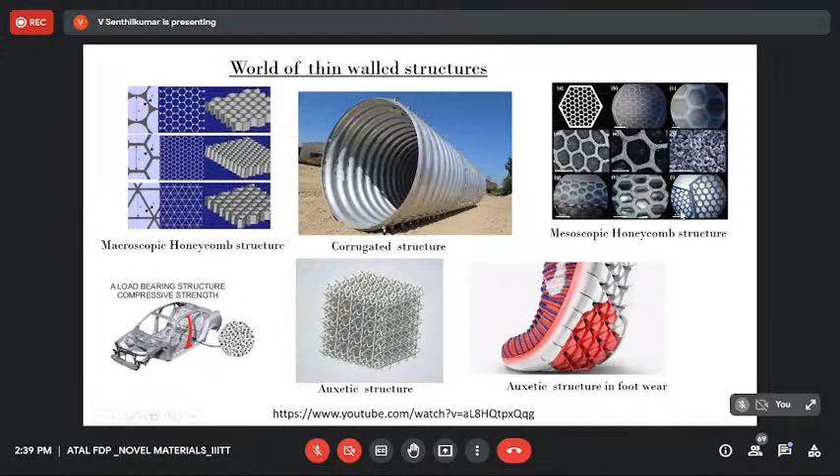So most of these thin wall structures make use of polymers, that is, polymer reinforced composites, or aluminum. That is the advantage of this kind of thin wall structure. Now there are three categories of materials in the thin wall structure. One is foam. I think you have some basic idea about foam. Foams have a pore structure; they have porous structures.

How to create the pores? It depends on the material; it varies from material to material. You can create that kind of foam structure with steel, with polymers or with aluminum. Different manufacturing processes are applied for producing this kind of structure.

So foams basically have pores. The pores are not uniformly distributed. It is a kind of probability distribution, so we cannot say exactly that at this place this many pores will be there. It depends on some other physics. So a lot of research is going on to evenly distribute the pores.

Basically these foams are created in two different forms: open cell metal foam and closed cell metal foam. Some of you would have done experimental work on open cell metal foams. Open cell foam we can create in a foundry by casting, and we can do it in powder metallurgy also. We can add some material that will evaporate when heated during sintering, and during compacting, the initial stage where the mechanical bridging is happening.

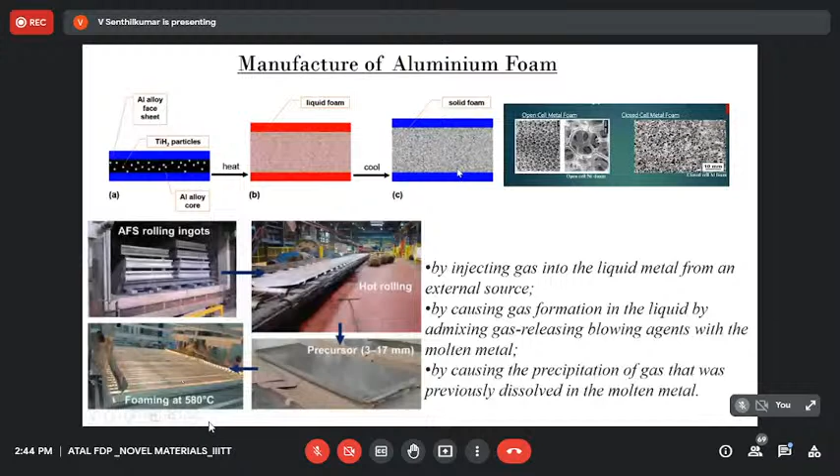So you can see here how these foams are manufactured. A long aluminum foam structure is created, AFS rolling ingots; these are the big ingots, and we can reduce the thickness using the hot rolling method. You can foam at 580 degrees centigrade, and this is the precursor. With this technique, mass production of foams can be achieved using this rolling method. Rolling and foaming is done. Foaming is the process of blowing gases through which we create these foams. So these are the manufacturing techniques for these foams.

So what are the advantages of these foams compared to conventionally available metal? Here I have taken this aluminum foam structure. Suppose we take steel as the baseline. Required thickness for equal stiffness, let us say 4.7 mm. For that steel plate of 4.7 mm, the equivalent stiffness in aluminum requires a thickness of 6.8 mm. For CFRP, carbon fiber reinforced composites, the thickness has to be increased to 5.6, but see how much mass is used for steel.

We know the density of steel is 7.85, and for aluminum it is 2.7, and CFRP is further less, normally 1100 or 1200 kilogram per meter cube. For this aluminum foam structure, the maximum relative density is normally only 28 to 30%. So even though aluminum is 2.7, here we get only 400 to 500 kilogram per meter cube. Just imagine how much weight it saves. The equivalent mass of steel is 73.3, and the equivalent stiffness with this 8 mm aluminum foam structure is only 12.8 kg.

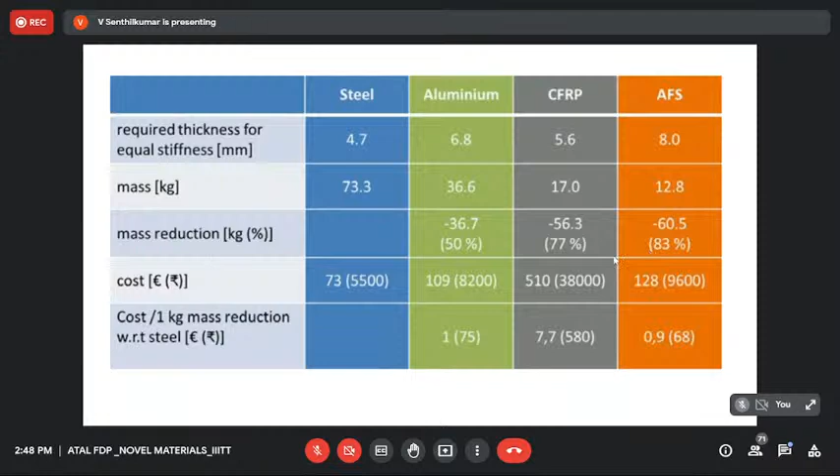The next thing is where it is being applied today. Earlier these metallic foams were mainly applied as structural materials, and today it is being applied everywhere. Today I will take one case study where this can be applied for a high-speed train. At the front of the train, we can have these buffers, so that it will absorb energy during a collision of the train.

So earlier it was applied only for energy absorption as structural materials. Today it is applied everywhere. Wherever you want to reduce the mass or absorb more shocks and energy, you can apply this. You can see some of the applications here. Here it is used in the battery compartment of an electric vehicle, where the weight of the structure has to be reduced, and for that we are using compressed aluminum foam structures.

They are used in the sealed edges, the module comprising underbody, and battery compartments. And you can look at the second diagram where exactly it is located. You can see the crash absorber box at the front of your automobile, made of a rectangular aluminum alloy profile filled with aluminum foam.

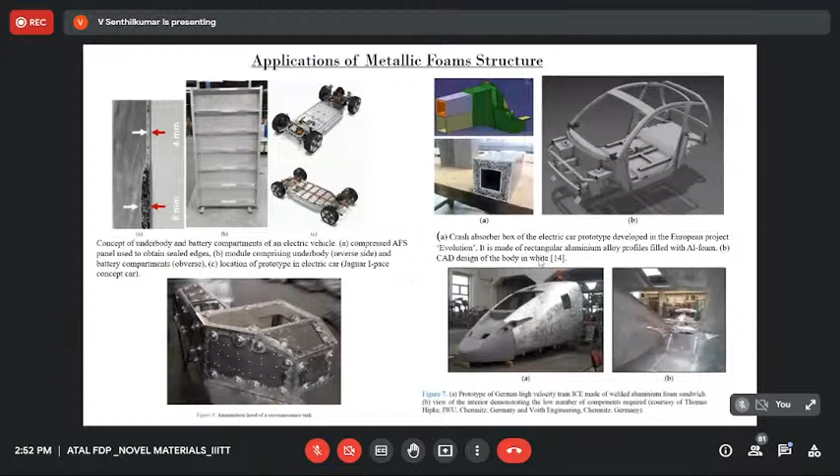Okay, so what are the other characteristics of that? It is having low density, we know that. The second one, it is high strength to weight ratio. Second advantage, high surface area to volume ratio. This is like nanomaterials. It's having high surface area to volume ratio. And it is having one advantage compared to composites.

What is the drawback with the composites? So I hope you can also interact so that it will be somewhat good. Understanding will be good. What is the drawback with all the composites, right? These polymer composites. And in fact, the drawback with the processes like rolling, extrusion and all. So they are good at reducing this.

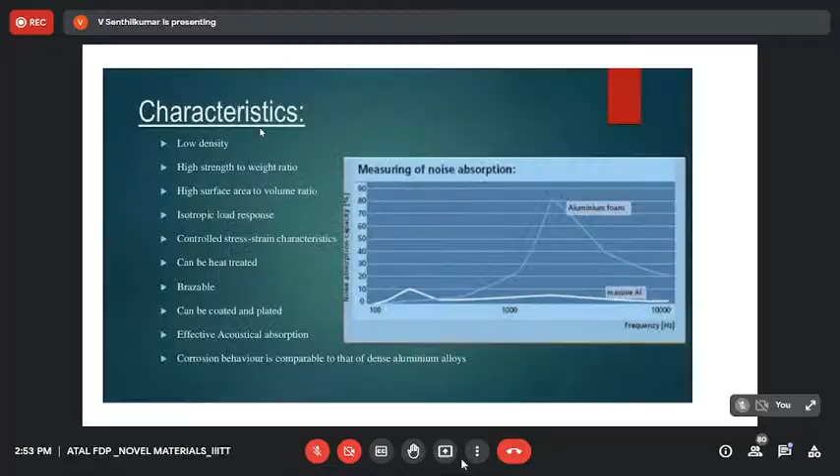The other things are, the first three are very good. They have low density and high strength to weight ratio. They have good surface area to volume ratio. Everything is good. But when it comes to that fourth property called isotropic load response, okay, this foam will behave like an isotropic material. What do you mean by isotropic? What is the drawback with the other polymer composites?

Polymer composites, you have these polymer composites. Even today they are designing them with good fire resistance and all. Okay, in spite of all, they have one drawback. What is the property that is called? Yes?

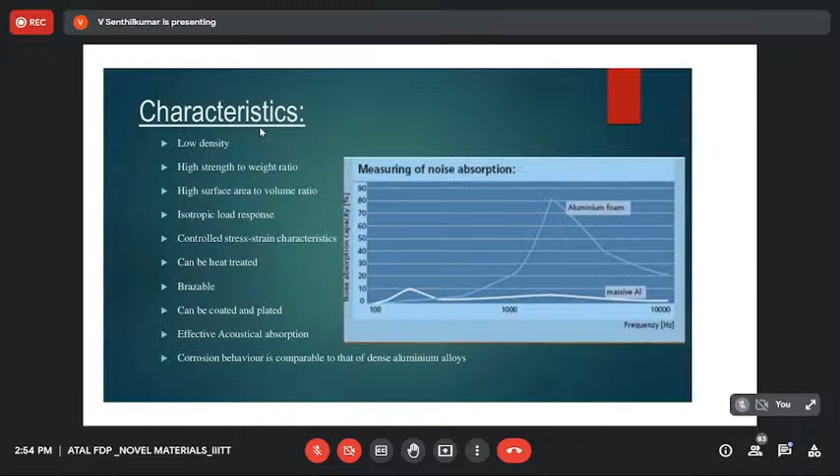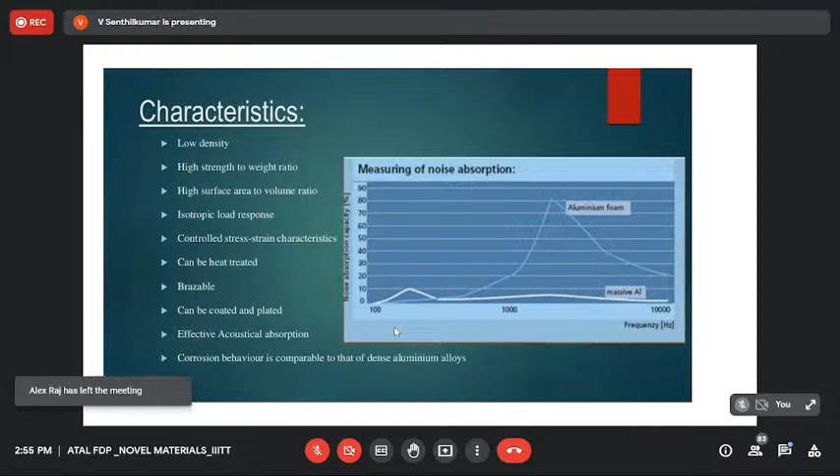So, Velmurugan, are they interacting or? Yes, I could not get it. A little louder I can talk, since I'm not using any headphone, a little louder maybe. Yes? Yes, sir. I think one participant said something, but the voice is not clear, sir. Velmurugan, my audio is good there, no? Yes, sir. Your voice is clear, sir. Okay. Voice and screen. So are people interacting with the faculty members or? Yes, sir. Okay.

So at least some of you interact with me, it would be good, because these are some basic things which you will teach, because all are mechanical engineers, it is told. So it would be good if you interact. I will not get bored, but it will be monotonous because we are online. When I'm on the stage looking at your faces, I get some feeling of conveying something. Otherwise, this would not be good. So I expect some of you to interact with me. I will not pose anything much challenging. It's all basic fundamental ideas only.

So like I told, manufacturing processes like rolling, extrusion, and drawing operations have an inherent problem of anisotropy. When you have anisotropic properties, you can't expect the same mechanical properties in all directions. When it is used as a structural member in some product, the behavior of the material upon disturbance from external media should be the same, irrespective of whether the load is applied in the x, y, or z direction. It has to respond similarly.

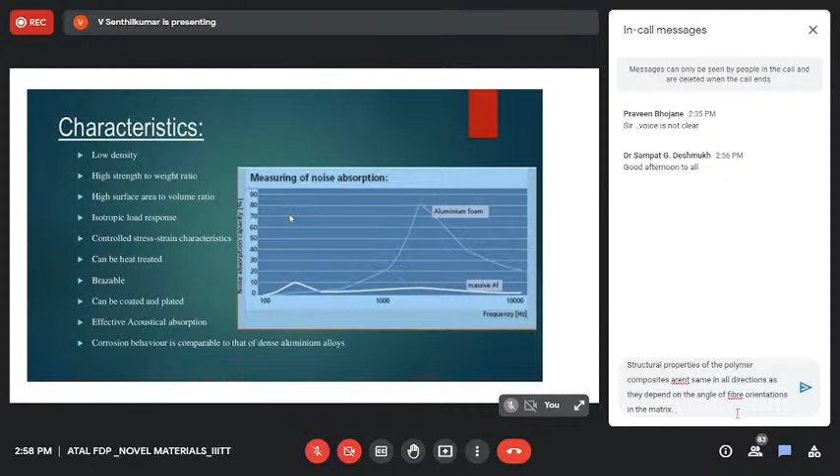Now you see the graph where conventional aluminum alloy and aluminum foam are being compared, and the noise absorption capacity is very high. So this can be applied in acoustic attenuators. Wherever you want to absorb acoustic waves, we can use this aluminum foam.

So now we'll move on to the second class of material called honeycomb structures. We have seen the manufacturing process for foams and their advantages compared to conventional material. Now coming to honeycomb structures. Why is it called honeycomb? The name says that it is used by bees for storing honey; they build the hexagonal structure using wax, and in that they store the honey.

Actually, these shapes are nature created. Foams are not like that; they are artificially created. But these honeycomb structures are nature inspired, especially this hexagonal honeycomb. What is so special about this hexagonal structure? Can you tell? Because the hexagonal structure has an advantage compared to other shapes.

It may have a triangular shape. You can create square shaped structures, trapezoids, circles also. Compared to all other shapes, what is the advantage of going for a hexagon? Why are these bees building the hexagon as one unit? Any idea?

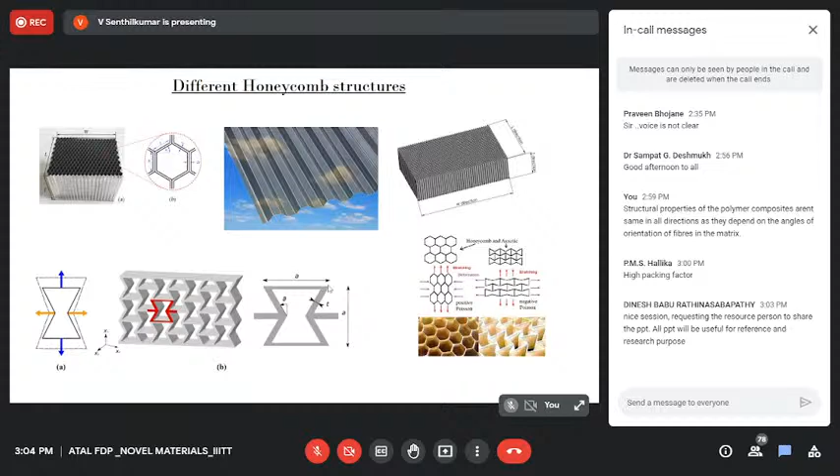So simultaneously, what happens to the length is it gets increased, and what happens to the diameter? The size is reduced. You increase the length, and the shape is reduced. So what do you get? Positive Poisson ratio.

Unlike that, in the case of auxetic materials, when you are applying load, by virtue of the geometrical arrangement, when you are stretching, what will happen is that this material gets expanded. You'll see in the next slide how it expands. So when you apply load, you'd expect the cross section to reduce, but it doesn't happen because of the arrangement of the structure, the geometrical arrangement.

So when you apply load, what happens? It elongates, expands. You see here, this is the original configuration. It's called a double V structure or a re-entrant component. It looks like a double V structure.

So when you apply load, what happens? It comes out of it. You can see here the dotted one is what is called after elongation. When you apply load vertically, the final unit cell will be like this.

Now, instead of stretching, I just apply a compressive load. What we expect when compressing that material is that it gets elongated, isn't it? Like forging, when you do upsetting, when you apply load, it bulges - the diametrical dimension increases. But that's not what happens here. When you apply load, it further reduces in the direction of loading.

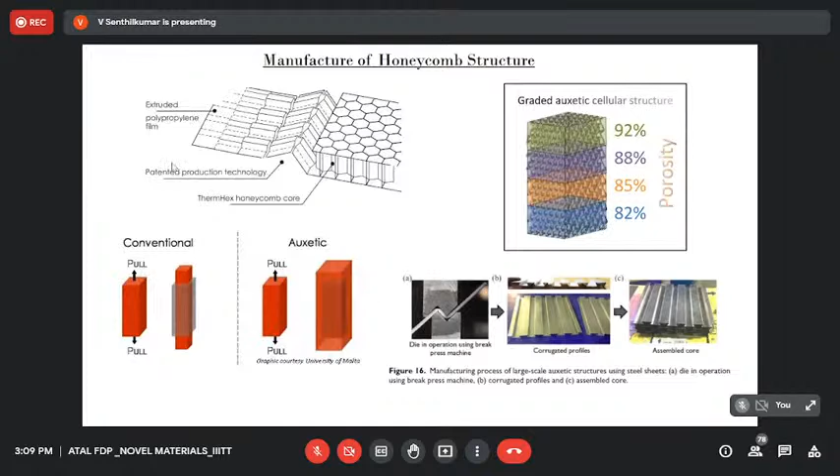So these are graded auxetic cellular structures. This is a continuous material, and initially it is 82% porosity. So here also it is porosity everywhere. Now in the honeycomb structure, how do you calculate the relative density for this material?

Foams, how do you calculate the density? Foam density you can calculate using the Archimedes principle, you can find out the volume, and then calculate the mass. Mass is the property you can directly get, and volume you get from Archimedes.

How do you get this theoretically? We can create a unit cell, and find out the total area of that and the area of the sheet metal. Then we can find out the relative density.

Normally, for aluminum foam, the maximum density is 30%, but in real applications you will use only 15%, 20%, depending on the application. This honeycomb will have a maximum density of 10 to 11%.

You will normally get 7%, 8%. The maximum density achieved in hexagonal honeycomb will be around 10 to 11%. This auxetic structure will be slightly more, you can get up to 20%. Corrugated structure, we may go up to 15%.

How can you design that? This is the unit cell for the auxetic structure. This thickness, the foil thickness, you can increase. This is your sheet metal.

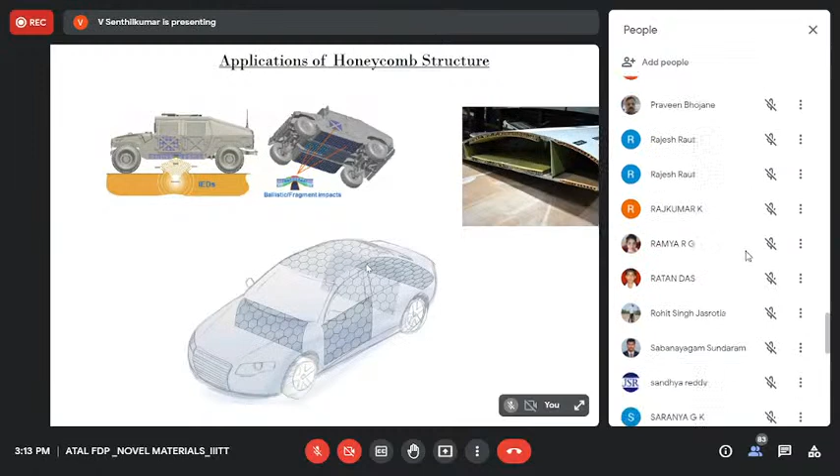In electric vehicles, it's everywhere, because electric vehicles require lightweight construction, but simultaneously you cannot compromise on stiffness. So we are using this kind of honeycomb structures there.

That will also absorb energy. For any collision impact, that will absorb more amount of energy. Another area where this is being very prominently applied is in armored applications.

Here, when an explosive device or mine blast happens, this is applied in the floor plate. The floor plate will absorb energy, whatever blast waves occur, and these waves are absorbed by the honeycomb structures.

These are also applied in the sideway panels, because hand grenades are thrown to the side, not at the bottom. This happens when they use IEDs or mine blasts, and normally they throw grenades sideways.

So there also we are reinforcing all these panels with this kind of thin wall structure, reducing weight while simultaneously increasing the energy absorbing capability.

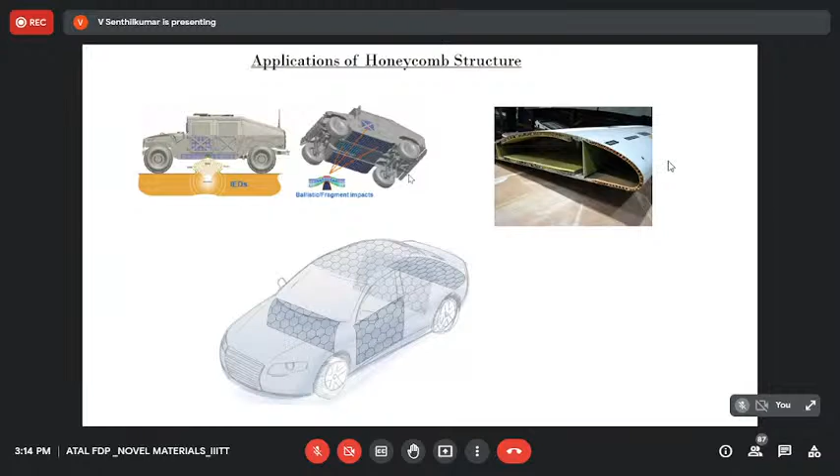Now coming to the design part, how to design a foam—in fact the same concept applies to the honeycomb also. Design of polymer composites is different, but the design of foams and honeycombs are almost the same. How to do that, I'll tell you.

So, up to this point in the slides, if you have any questions, you may ask before proceeding.

Good afternoon sir, when you're talking about the auxetic material structure, is it that you can get the auxetic material only by a change in structure, or can we also get it through an alloy, by changing the compound? Yes, yeah, you can see the material is different.

So I told you, all these lightweight thin wall structures have a twin objective. One is you can keep increasing the strength by alloying. We now have aluminum honeycombs using various aluminum alloys—6000 series, 5000 series, 2000 series are used. Whatever new alloys come up with good strength and good corrosion resistance, you can use. But it has nothing to do with the material itself—it is simply because of the geometry. By engineering the geometry, we are getting the property.

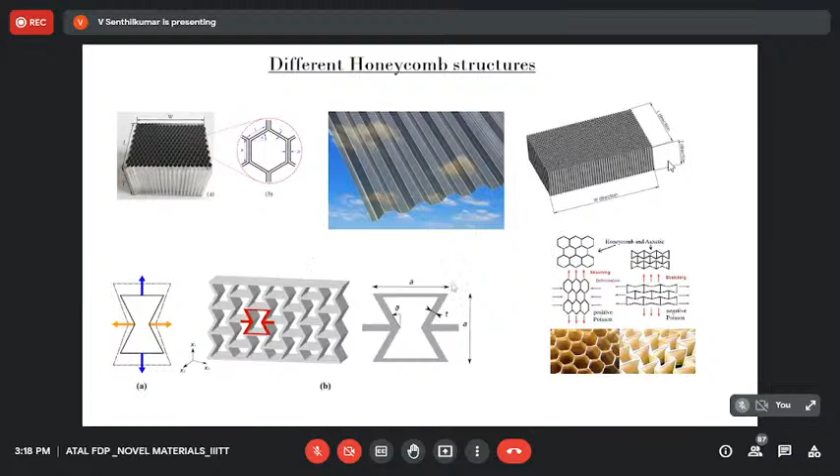Okay, these are all the design aspects. Thank you, sir. So now coming to how to design.

We'll see this normal stress-strain curve—we know about the stress-strain curve for engineering materials, having an elastic limit, then a yield point, then flow localization or instability point, and ultimate tensile strength and so on. Now it's different for this kind of material.

The plateau region is where the slope is very gradual, almost constant—sometimes nearly horizontal. For the same stress or load, as long as you keep applying the load, the strain continues happening. Then the third region is the densification region—once densification starts, the material begins performing like a 100% dense material.

Now we know they are not fully dense—they have 20% or 30% density compared to conventional material. So what happens in the first region? If it's a foam or honeycomb structure, it will not close down—crushing will not start. At the end of this first slope, the crushing starts.

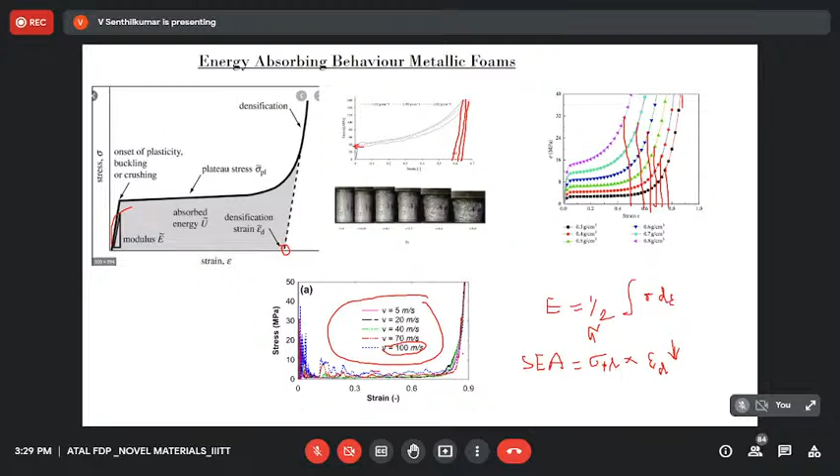So, as I told, this honeycomb structure also behaved like this. As you increase the density, you can see that this is going this way. Again, like foams, they have three distinct patterns here. The elastic behavior is not so apparent, whereas this is the plateau region, stage 2. Stage 3 is the densification region. So the first region is not apparent there, but this shows two distinct regions.

One is the closing or compacting region, this is a fully compacted region, and this is where the load is applied on it and the height is reduced. These are the curves for force and deflection, and you can see how this midpoint deflection happens under a normal load. The property is tested in different directions. You have three directions, I told you, and they are not behaving like an isotropic material like foams.

So these are anisotropic materials. That means they are behaving like an orthotropic material. What do you mean by orthotropic material? Anisotropic we know. What do you mean by orthotropic? You would have heard about composites. Composites are orthotropic materials. What do you mean by orthotropic?

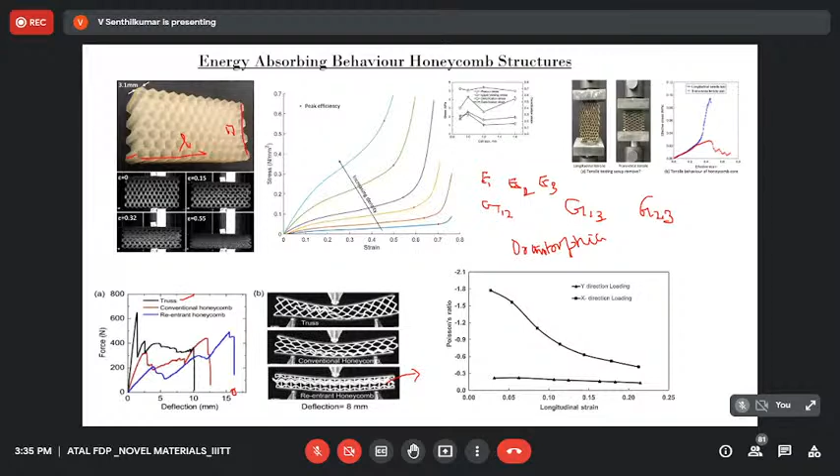So for that we have to initially design: this much energy I should absorb, so this should be the stress and this should be the strain, and these are the unit dimensions. What should be the size of that honeycomb cell, or if it is auxetic, what is the re-entrant angle, and what is the thickness of the foil, and other things you have to design.

So some other design aspects here. These are some material data. I told you that the density starts from 10 to 104 kilograms per meter cube. The density is very small. And see the energy absorbing capacity of these different materials. These are the densities available, and in the graph you can see different densities from 26% till 46%. This is nothing but relative density.

Rho star is nothing but the actual density of the foam divided by the density of the fully dense, solid material. So 0.263 means 26%. On the vertical axis is energy absorption capacity, W, in megajoules per meter cube, as mentioned here.

Let me tell you how to use this graph. Say for example, I'm using this first material. What is the first material? Its density is 26.3%. For this, the maximum strain can go up to 0.7 something. And the maximum capacity I can go up to is something here, close to 5 megajoules. This is megajoules per meter cube.

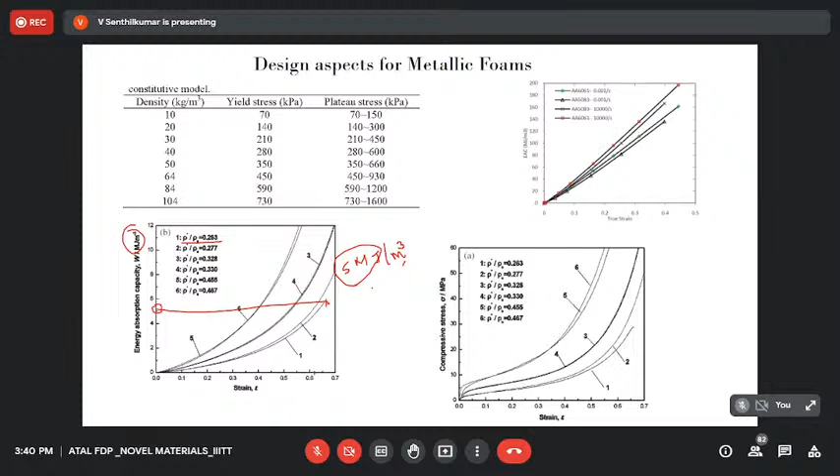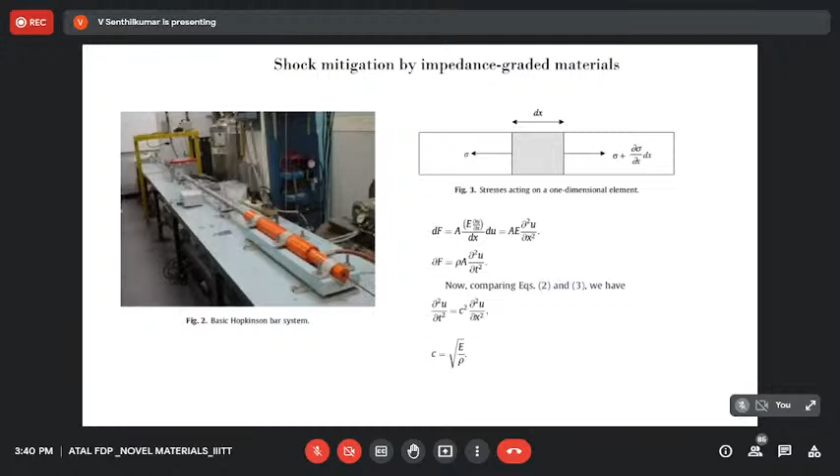So what we have seen is many different kinds of structures and their behavior, how to calculate the energy absorbed, and how to use standard literature for designing our own products. Now we'll move on to how this stress wave can be mitigated. Shock mitigation means reduction or absorption: you stop the shocks propagating in the direction of the waves. These are based on a physics concept called impedance, shock wave impedance, a very important concept for designing this material.

Okay, now we know you can have your own structure. You can create metallic foam, you can take one layer as honeycomb, one layer as foam, a combination of these layers. One, we know they have good energy absorption capacity. The other is how they can mitigate the shock, how the shock wave can be minimized. That's what we are going to see.

For example, take this kind of structure, a pressure bar, where we have different materials at different locations: titanium, stainless steel, aluminum, many materials. If one part is impinged upon by some shock or impact, it is transferred from one material to the other. For example, you create a channel, and inside it many materials are arranged in order: steel, brass, aluminum, composites.

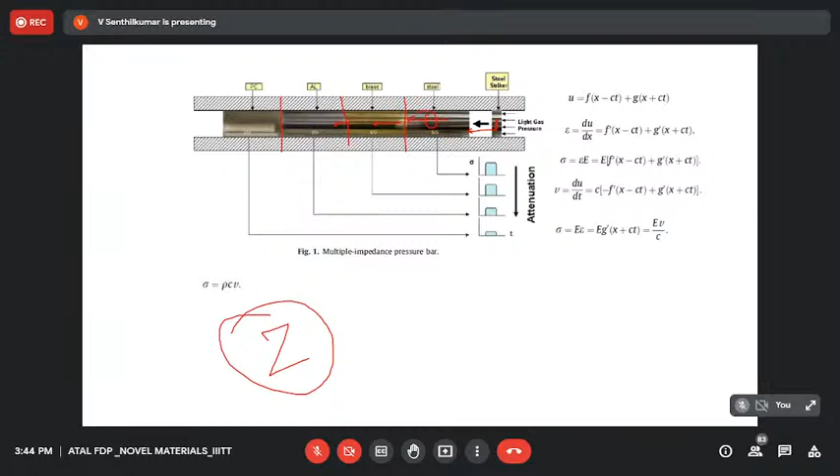Is it understood? Okay, so the initial thought was that once the stress wave crosses and enters the other material, it is completely relieved from any shocks, but it is not happening. Something is reflected back, and that depends on the property called impedance. That impedance decides how much has to be reflected and how much has to be transmitted. So based on some basic physics formula, we are going to get it.

Now let us assume it is one particular structure, and this is a stress generated here at a distance of dx. It's a simple slab analysis we are practicing in mechanics. So now we are calculating this differential force, and that is the relation for the differential force. We can get AE ∂²u/∂x². Simple differential equation.

Then the same ∂F we can write in terms of Newton's second law, mass into acceleration, like this: ρA ∂²u/∂t². So now we can compare these two relations, one based on the simple stress-strain relationship, the other based on the second law of motion. We compare these two and introduce this parameter called C. That C is nothing but what? The elastic wave.

When a stress wave is generated, this elastic wave is transmitting and going to other materials till it stops, and the speed of that elastic wave will be like this, as long as this is within the elastic regime. When it crosses from the elastic regime to the plastic regime, this will be different. This elastic wave speed is the square root of E by rho, C equal to √(E/ρ).

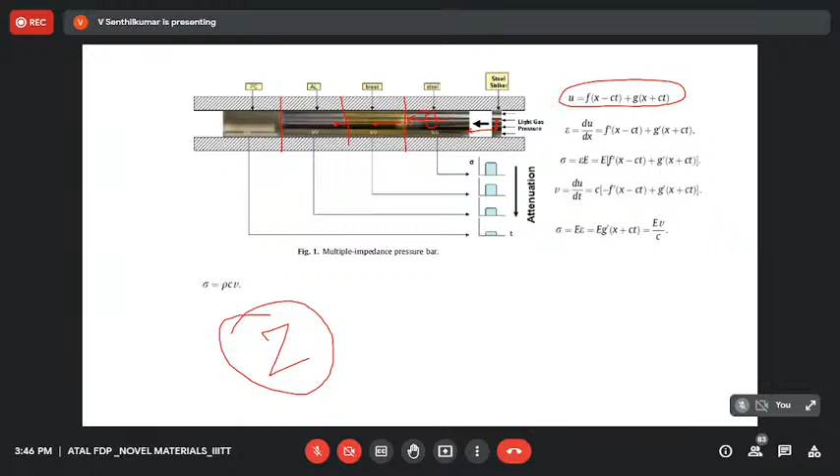Now we are writing a representation of the displacement. The displacement wave function we can write like this: f(x − ct) plus g(x + ct). The positive one is the direction in which the wave is moving, the transmitted one, and this is the reflected one. So this is the displacement of wave motion, as a function of time and your C value, that is the elastic wave velocity.

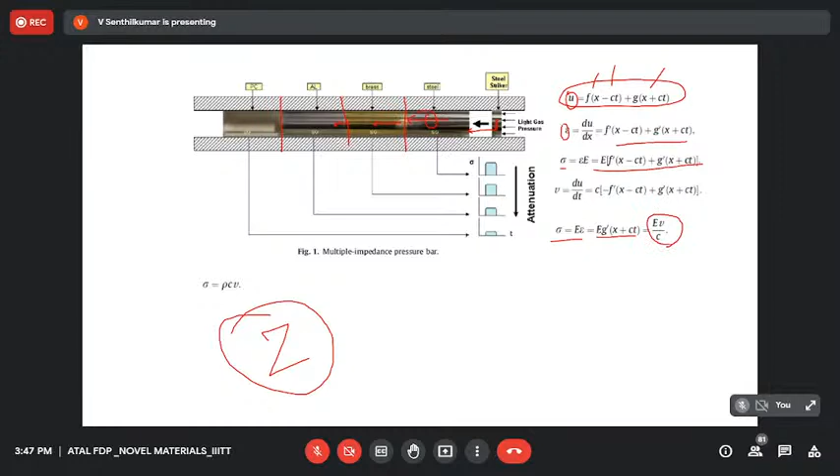Then we know that the strain is du/dx, and we can write like this. Then finally the stress can be related with that, and you are getting this relationship. So now stress equals E into epsilon naught. We can rewrite that equation, and that is equal to what? ρC. We know that C is nothing but the square root of E by rho, and then we can write this sigma in terms of ρC.

So I explain it again: the displacement can be defined in this way, in a wave form, where C is the elastic wave velocity and t is any point in time. So we can calculate the strain from that, and we are getting the stress from this. And for stress we are taking only the positive wave, the wave which is passing in the direction of the movement.

The striker direction is this one. We are not considering the reflected wave, only how much is transmitted in the direction of impingement of your stress. So that we are calculating. Then sigma equal to ρCv.

And this rho into C is what is called as the impedance. Rho into C is what is called as impedance. That Z value is called impedance. So this impedance is now an elastic property, and this is mainly for stress wave transmission. Now coming to that,

the transmitted wave: this is the basic physics, that F is force, and the transmitted force will be equal to the force applied and the force reflected. So the sum of these two will be equal to your transmitted force. So Fi plus Fr equal to F. Or we can also write this in terms of velocity. And now this is imposed. This is the condition for how much of the wave is transmitted.

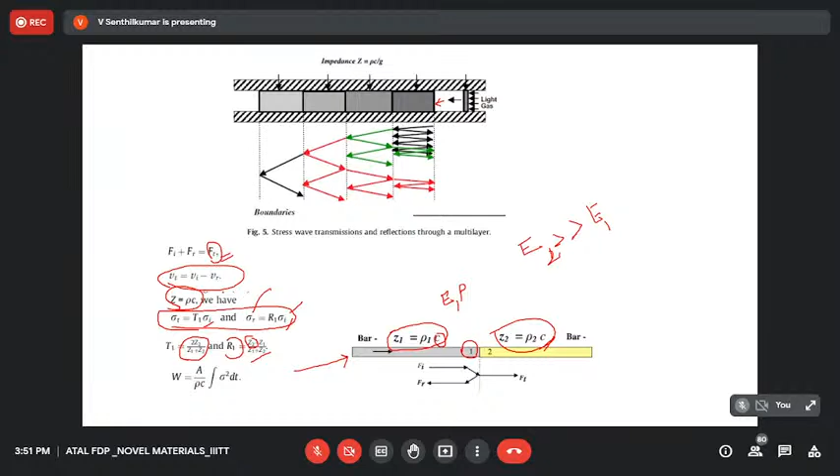And for transmission, Z2 is the impedance of the second one. When this value is large, a large amount of stress will be transmitted. So what we expect is that Z2 should be as small as possible, so that the T1 value will be less. Then your transmitted stress will be very less. The amount of stress transmitted to the next structure, the next level, will be less.

And the reflection? When Z1 is large and Z2 is small, R1 is negative. It is going back. So this is called the impedance mismatch. When the impedance mismatch is larger, suppose an incident stress of 500 megapascal is induced. Only 100 megapascal is transmitted to the next structure, and 400 megapascal is reflected back.

So everywhere, from one structure to the other, you can calculate how much will be transmitted and how much will be reflected. For example here, this much energy is transmitted to the next one, going gradually like this. When it goes to the second layer, this much is transmitted and this much is reflected. You see the backward arrowheads are all reflected.

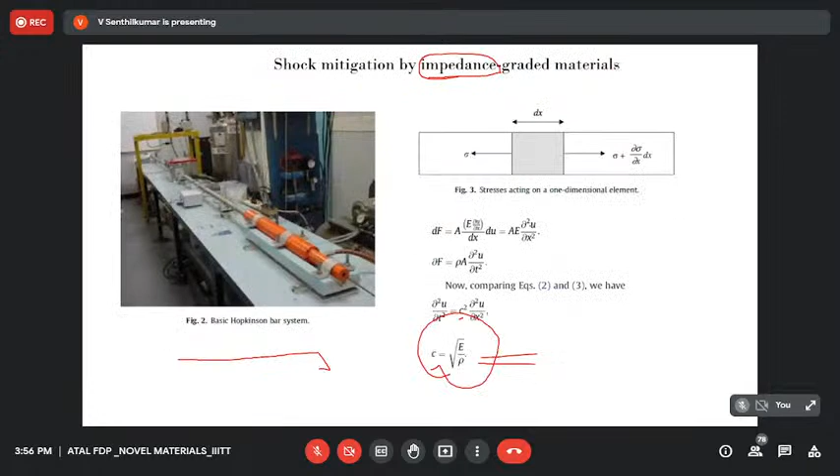Sir, how to calculate the displacement value of transmission and reflection waves? How to calculate the displacement value? This one you are asking about? Sir, the next displacement value. What you are telling, how to calculate the displacement, right? Deflection. Yes sir, yes sir.

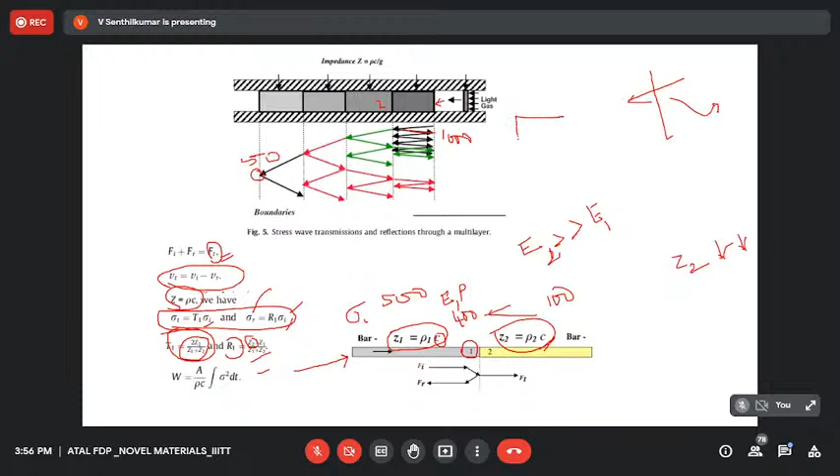Deflection, that is fine. Your structural principle will not change. For example, you have a structure like this, maybe with a diamond or square cross section, and this is the stress - this much amount of stress is incident upon it.

Now, can't you calculate what is the strain here? You know the Young's modulus of that, and from that you can calculate the strain. Am I correct or not? That does not change, that will not change.

For example, say there are how many layers here? Sir, 4. This is a striker bar and this hits here, and you have 4 materials, right? Material 1, 2, 3, and 4, with 3 being polymer based material.

What I'm telling is, here with some velocity something is hitting, or a shock wave happens - assume that is 500 megapascal or something. How much will this material be strained now, the first material? It depends on how much strain will happen, and that depends on the Young's modulus, is it or not?

Yes sir. You know the stress and you know the Young's modulus of that, then you can calculate the strain. Then, knowing the original length of that, you can calculate the displacement from that - that will not change.

Now the question is, how much will be transferred to the next layer? That depends on the impedance mismatch, because two materials come into contact. So at the junction, we might expect that the same 500 megapascal is moving to the next structure, but it is not happening like that.

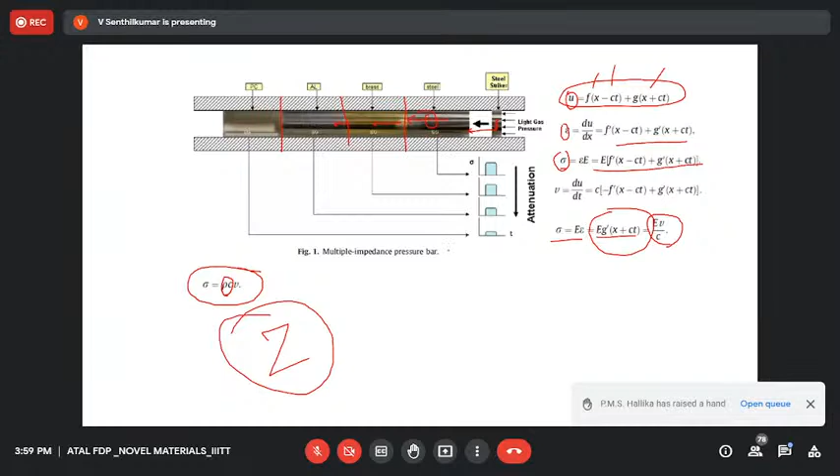That's what your question, right? Yes sir, thank you sir. So that is nothing to do with this impedance, that is normal engineering material principle, structural material principle. Okay sir, thank you sir.

Okay, so now you see here how, for example, this continuous impedance graded material - continuous impedance graded material, that means one of the sessions is functionally gradient material. When you are continuously graded, for example, density is keep on increasing, you are increasing that density or you are increasing the Young's modulus of that. So that means you are continuously, as a function of distance, having different density and different Young's modulus.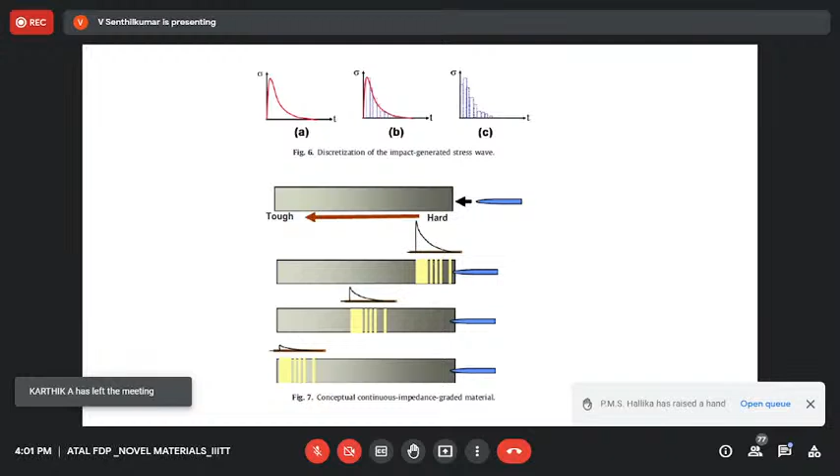Then what happened? Then this stress is gradually reducing like this. You can see here, it is gradually reducing like this. So initially here it is very hard, then it slows down here. When it is coming to that last one, this is where the projectile is coming to. So like I told you, this hand grenade and all - so when you are using this kind of material, this hand grenade at the initial impact will be very hard. Because of the impedance, the stress wave propagation will be less and lesser, then becomes completely stopped, the stress wave propagation is stopped at one location.

Okay, so right, another half an hour I will take two cases where this can be applied. One is that the honeycomb structures used in the high-speed train. This paper was published in a Crashworthiness journal, and here they are applying this honeycomb structure at the front.

And they have implemented this also in the high-speed train. So they use two buffers on two ends, and in the high-speed train, this is called the head car. It is called the head car, and this is the middle car. Head car, middle car - the middle car is where the compartments are there. Then on both sides the head cars are there.

Actually, when you want to change the direction, then automatically what happens - you will turn it and use it. This is the middle car of it.

So the energy absorbed by the impacted end of a head car - they are using this kind of principle, and these are the conventions, different designers will use different factors. R1 is a factor, and FD is another dynamic factor. K1 is the energy that is being absorbed.

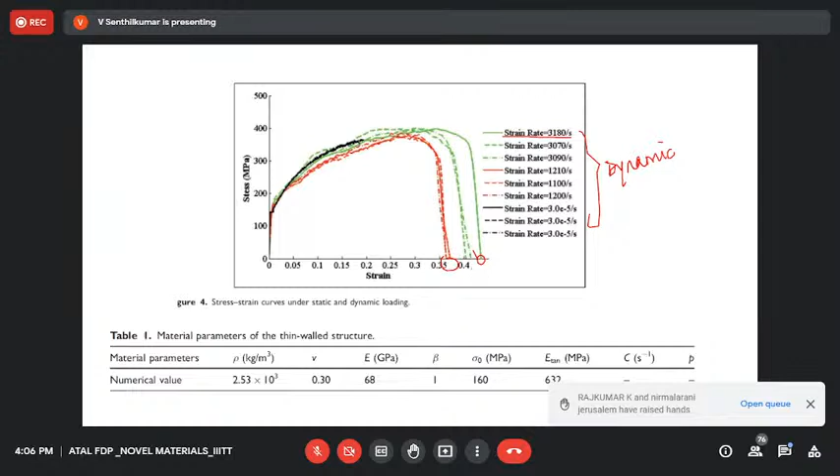The red one is the strain rate of 1210, and the black ones are nothing but very smaller strain rates, that means 3 into 10 to the power of -5 per second. This is the strain rate values.

For that they use this stress strain curve, because this has to be used in the analysis to calculate the deflection and the energy absorption and all. We have to do the analysis. For that, this stress strain rate behavior is very important.

Then these are again properties for thin wall structure. Thin wall structure means the outer structure alone, not the honeycomb structure. So for that it is thin wall structure: density and Poisson ratio, Young's modulus, some other properties like beta, and the yield stress, the Young's modulus, tangent Young's modulus, and some other factors. This is also calculated.

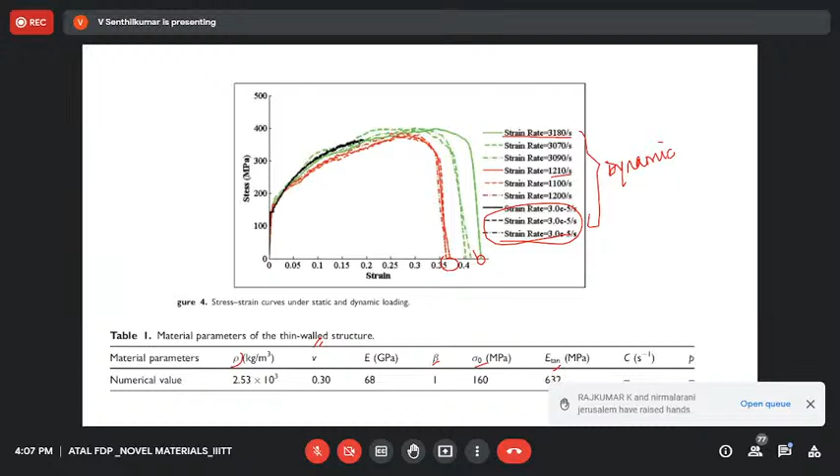Then, as I told you, this honeycomb structure has an orthotropic property, and for that we need the elastic constants. All 6 elastic constants are required: Young's modulus elastic constants and the shear modulus elastic constants. In addition to that, this is for the fully compacted material, and this is for the fully dense aluminum material. What is the shear modulus? And this is the Poisson ratio, and we know this is the yield stress, and this is the density of that.

You can see here, H1, now different honeycomb structures are used. So how to vary that structure? You have to vary the cell size. I told you, by increasing the thickness or by reducing the length, either by increasing the thickness, that is cell thickness, or reducing that L.

What will happen when you are reducing the L? So many cells will be there in the unit area, that means your density will be more. Your density will be more if you are reducing this length. So per unit area, you will have a large number of small honeycombs, small hexagons. How many hexagons are there? When you are reducing the size, so many hexagons are there, that means the mass will be increasing or density will be increasing. So 3 densities are being tried here.

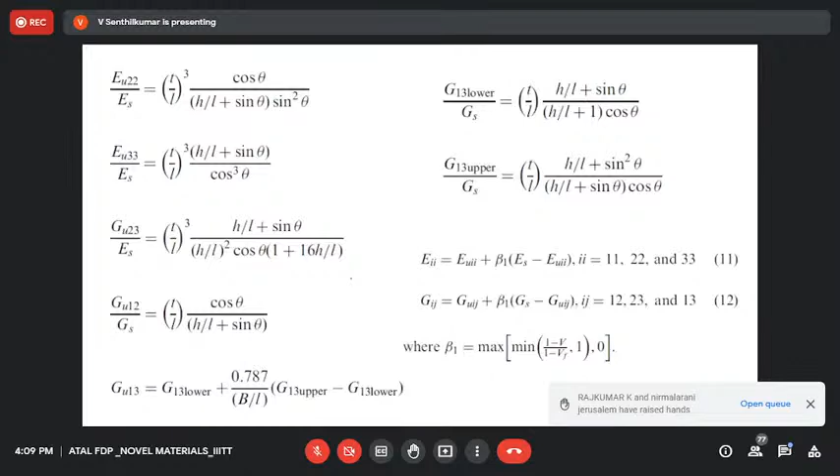So this is the compressive strain for those 3 things. H1 is for the lower density. Here it is 3184, or the density is 93.531. The sheet thickness remains constant, but we are varying the cell sizes. Here, for unit area, the number of cells is less, and here it is more, 187.

So what will happen when you increase the cell size or density? The sigma p value, your plateau stress, will be more. This is the plateau stress we have seen in the previous slide. There won't be much change in the densification. So energy absorption will be more as you go for higher density. The energy density will be more.

So for doing the simulation, you need the data in 3 directions. You can calculate it theoretically, or you can do the simple compression test in all 3 directions and get the curve.

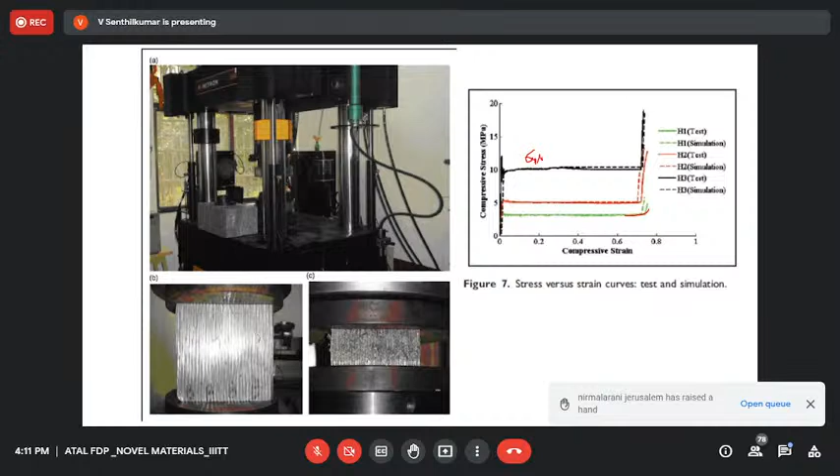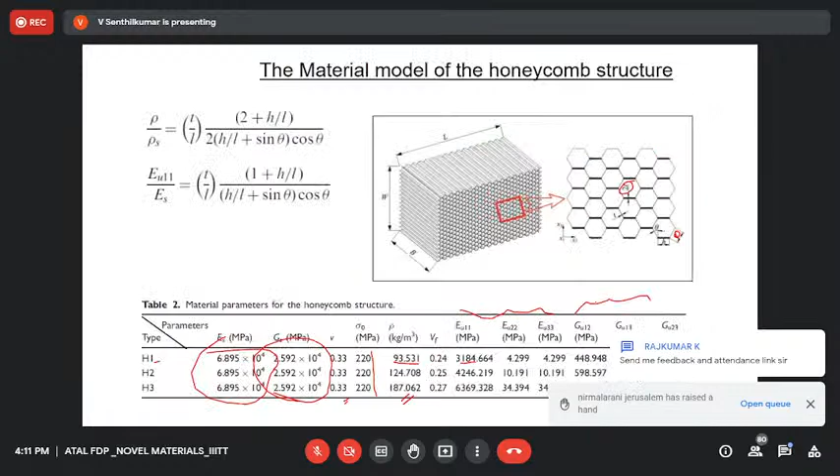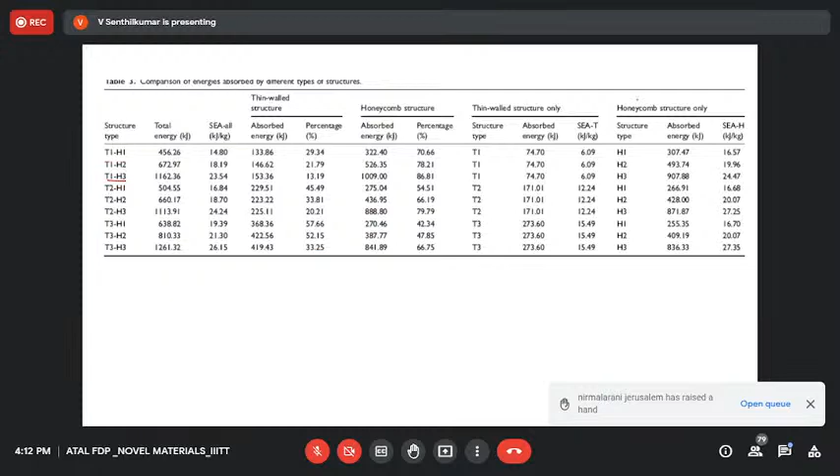And this tabular column gives you the capacity of this honeycomb structure. Say for example, in the case of T1 H3, this is for the honeycomb structure only. How much will it absorb? The specific energy absorption, energy absorbed per kg, is 24.47. So this gives an idea.

So we are using this paper for our research work. The literature gives us some idea about using this kind of material with this cell size, and it can absorb 24.47 kilojoules per kg. Suppose you are designing for 10 kilograms. It can absorb around 240 kilojoules.

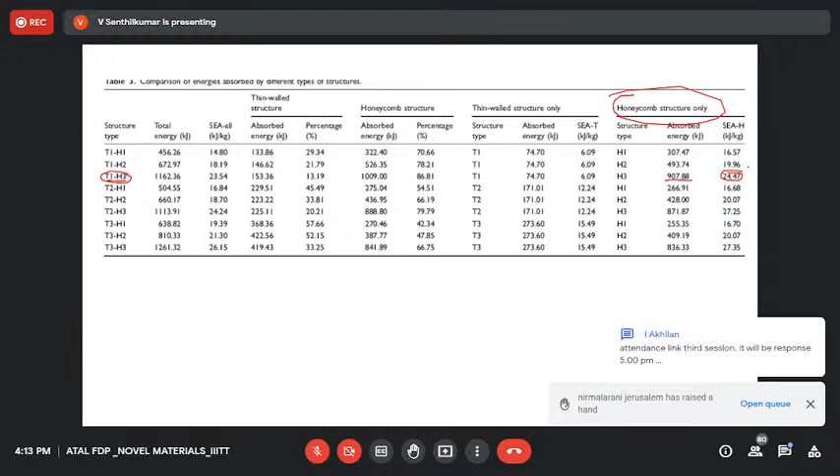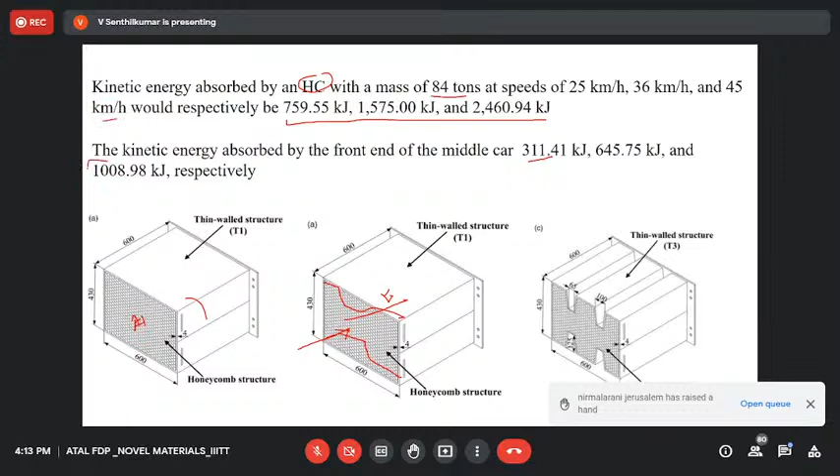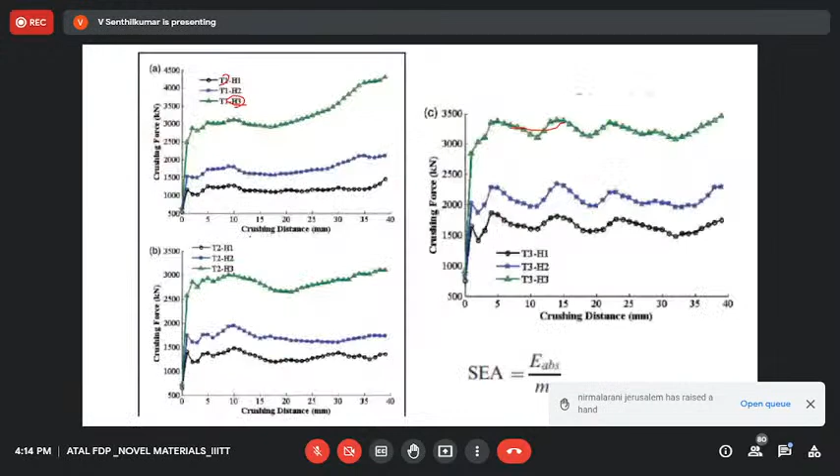Now go back to the problem. How much energy does it have to absorb? The kinetic energy to be absorbed at a higher collision speed of 45 km per hour is 1008. That much energy has to be absorbed. So if you use this T1 H3, it is 24.47.

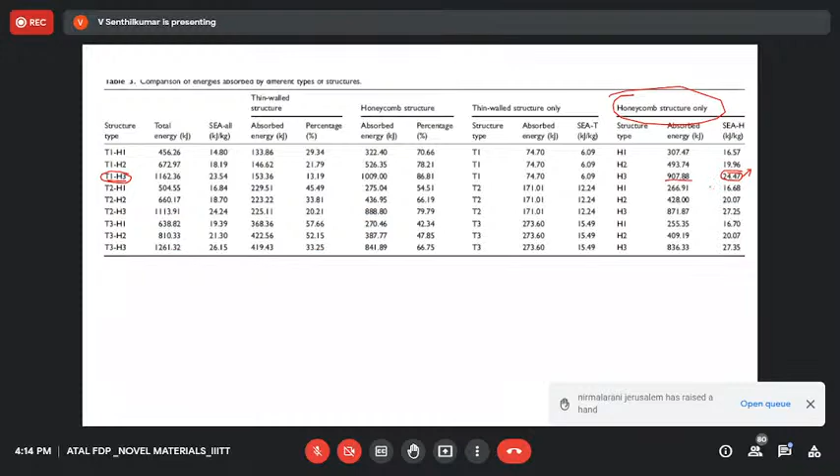So how many kg must the energy absorber be designed for? For 10 kg it is 240, so 40 kg gives around 1000 kilojoules. If you use around 50 kg, it will absorb the entire energy caused by this collision. You can have two energy absorbing structures here.

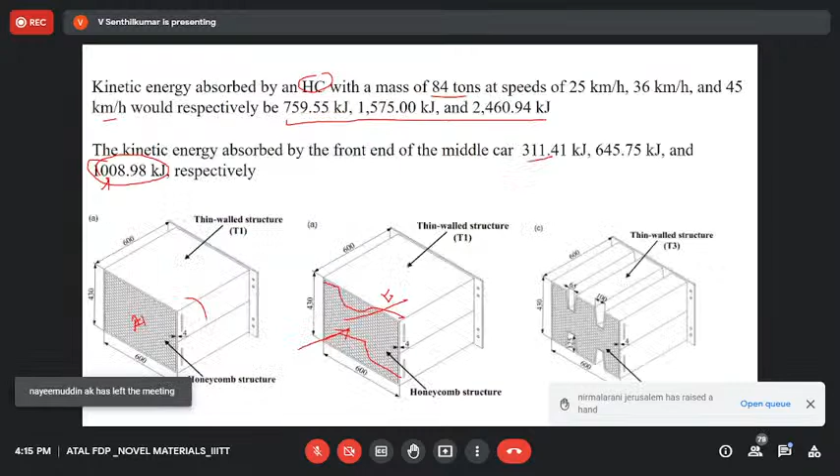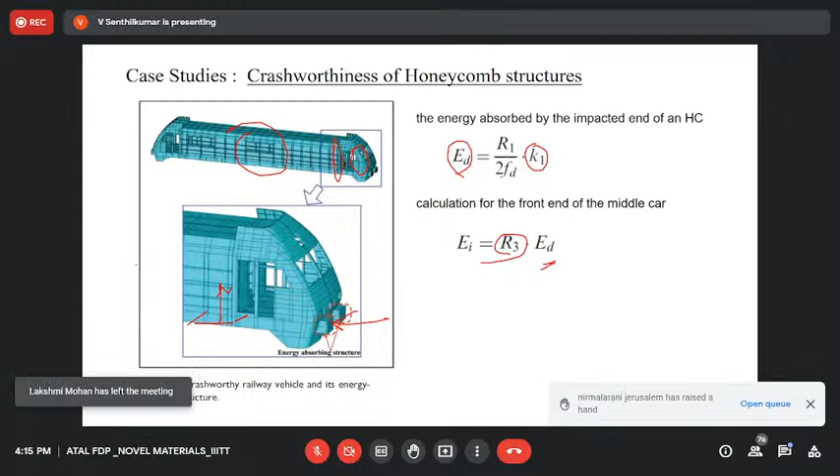Okay. Then it will not transmit to what? If you are designing like that, it will not transmit any force to the middle car. It will completely absorb at the front section itself, and it will not transmit anything to the structure. Okay, here this impedance and all is not used. The only thing is that we are making use of this honeycomb structure and its crushing behavior; it absorbs energy. Okay, so this is one case.

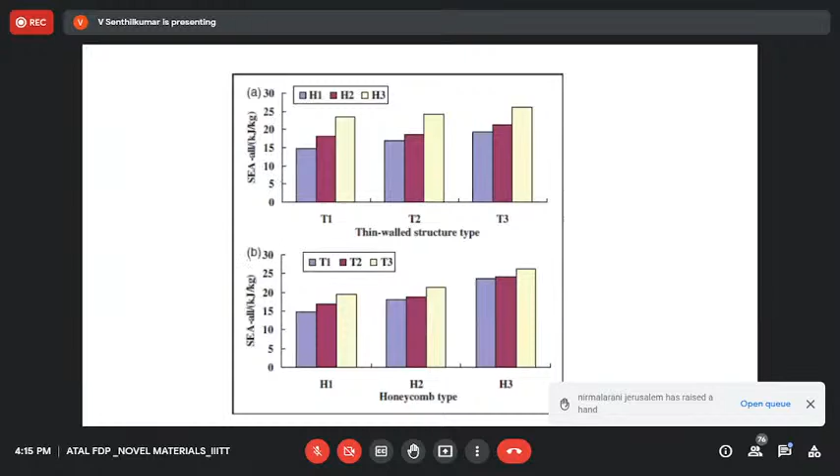And this again is a pictorial representation of the energy absorption capacity. The other one is how we can use foam structures for dynamic response and blast resistance. In these armoured vehicles, they are subjected to hand grenade attacks or floor plate mine blasts. That can be minimized or absorbed by means of a layered arrangement. Here you see different combinations are tried. I'll just give you a brief idea; you can download the paper if you are interested: the blast response of functionally graded foam structures.

Okay, so now 6 density foams are being tried here: 10%, 12.2, 14.3, 16.2, 18, 19.7. F1 is the foam density of 10%, and F6 is the last one, the higher density, from low density to higher density. They've used F1 to F6 in increasing order of density and in decreasing order of density. So they have designed these 6 configurations, and they wanted to study how the energy absorbing behavior happens.

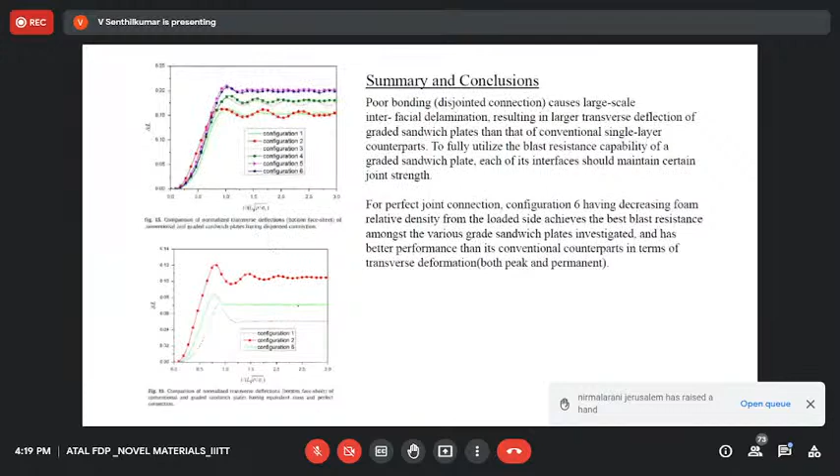Now I want to study whether the stress wave is reflected more, and when it is reflected more, the last face sheet would be subjected to less deflection compared to the other structures. Configuration 6 is where the first one is larger density, so this is decreasing order of density. Now let us compare these two. What is the work of impedance? You can analyze here. I will skip those things and come to that. This is 5th and 6th, right? Let us analyze that one.

Yes, the red one is configuration 5, increasing order of density, and the blue is configuration 6. The response is plotted in a dimensionless fashion. It is delta by L, and this is in terms of time; they use another dimensionless quantity, but anyway, it gives the magnitude. When it is higher and higher, the back face deflection will be more. They are calculating the deflection of the bottom face sheet.

That means, you see, in the application side, this is where your blast happens, and this is where your passengers will be sitting, or soldiers will be sitting. So I want minimal deflection at the back end.

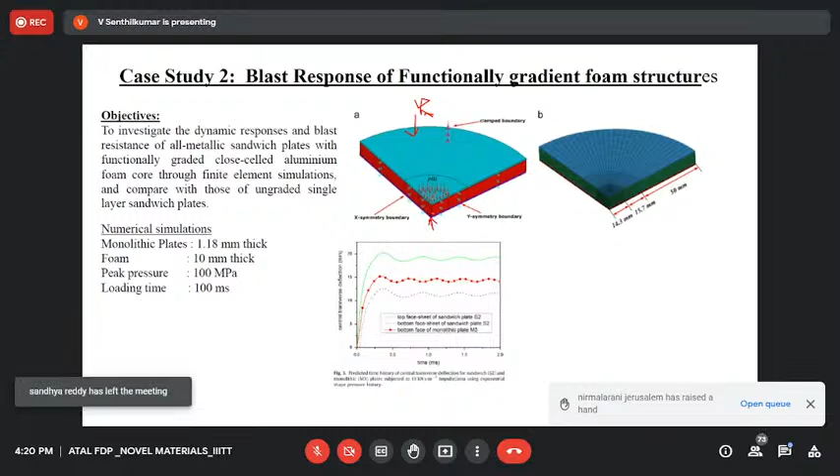Okay, and minimum distance deflection at the back end. That means here the blast happens, and this is where the structure will be there. Okay, so here blast happened, this is a structure. So I should get a minimum deflection at the back end. Okay, whatever deflection that has to be absorbed in between structure. So the last one is what the bottom face is.

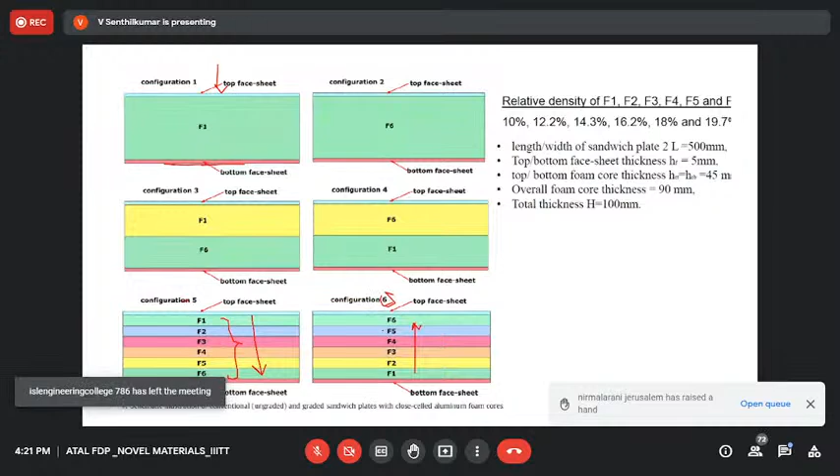Now, if we go to the curve, the red one, which is corresponding to that configuration 5, deflection is more there. Compared to that, deflection is less. Compared to that, it is significantly less in configuration 6. Okay, that shows that the decreasing order of density, that means the impedance mismatch, is continuously designed in such a way that the transmitted wave is less compared to the reflected wave.

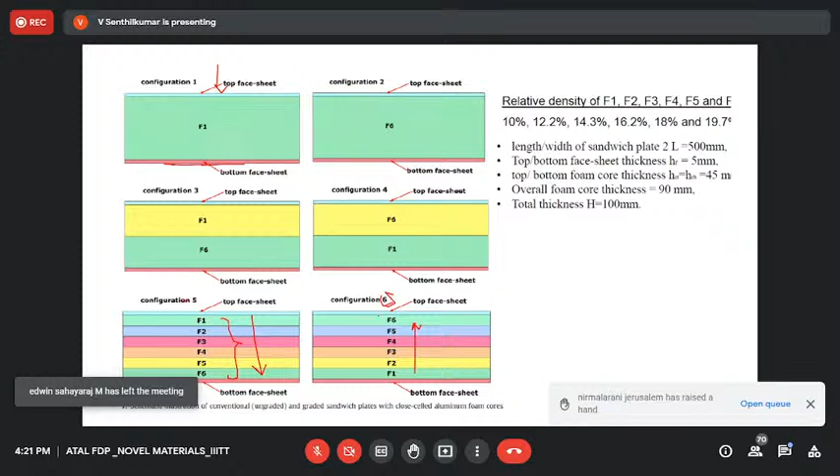So more amount of energy, the shock wave and pressure wave created during the blast, are reflected back. Okay, so that less amount of energy and stress is propagated to the subsequent layers, and so we will get a minimum deflection at the last one. So that is the observation from this. Okay. So these are the 2 case studies I wanted to explain. Now I'll just brief about this.

Another kind of nature-inspired structure has started being used. It is still in the research labs, and maybe in another couple of years we will find a lot of real-time applications. Again these are used in shock wave mitigation, where you want to have a blast resistant structure or impact resistant structure.

See, this is bio-inspired. If you see creatures like crabs, lobsters, the mantis shrimps in the sea, they take the prey by hitting it very hard. By hitting it very hard, they apply a very high amount of force, around 1500 newtons. Just imagine that. The creature is very small, but the impulse is very high. In a very small fraction of a second, they apply huge force.

And the velocity is 23 meters per second. So this much force they apply on the prey so that they catch the prey. Okay. So how about the other structure? This is happening at the frontal section, the frontal lobe, whereas the other sections are relatively soft and are undisturbed by the impact that is happening in one direction. Okay. So how do they get it?

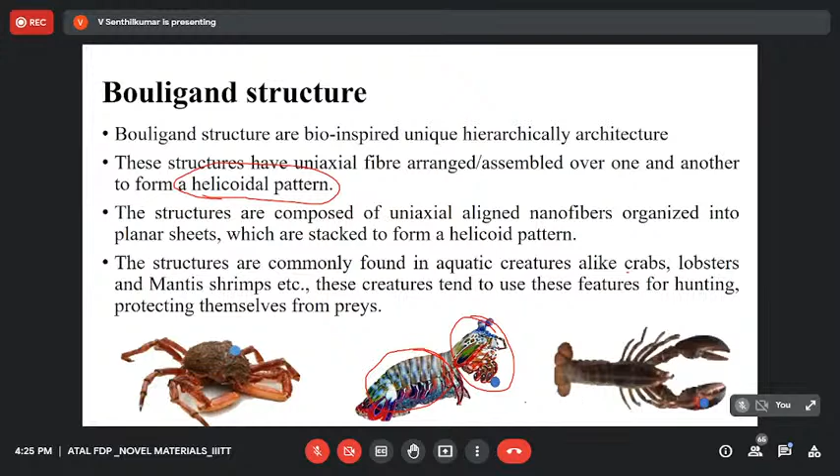So these creatures have such periodic structure. That actually filters the shock wave, the shear wave. So the shocks that are created there will not be passing on to the basic structure. Okay. Here it will not pass on. It will just stop there itself.

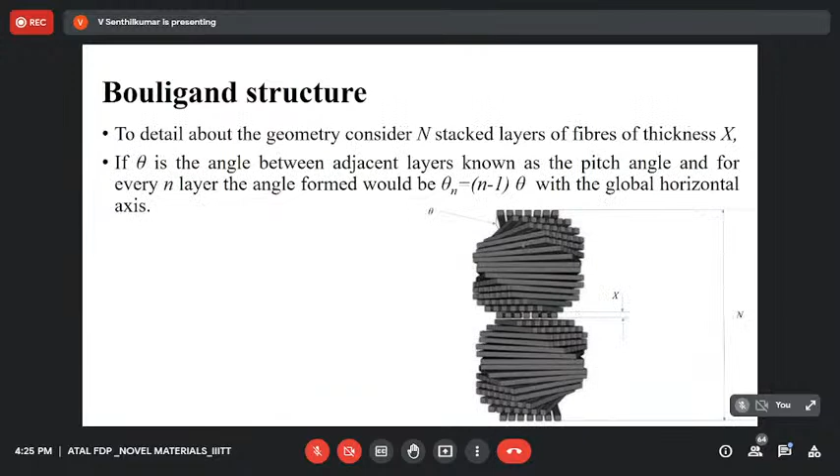Okay. So how do they do it? By means of this chiral structure or helicoidal structure. How many layers have to be designed? It depends on what your theta value is, and the number of layers.

And actually this is where this periodic structure is. You see every line from here to here; this is one period. Then from here, another period. Period means that it is rotated completely through 180 degrees or 360. Then the next layer has come. So you just look at that.

So through this, if the impact happens here, when it goes inside, this is only a soft layer. As there are two regions, it is hard compared to this, and it is softer. And this is even softer in the third region. So the impact is not transmitted to the adjacent region. So it is safer. This is happening in the mantis shrimp.

So, as I told, they are using this huge force of 1500 Newton. In fact, they are assumed to be experiencing an acceleration of 10,000 Gs, 1 lakh meters per second squared. That is the acceleration happening there, 10,000 G. So they retain their structure, and the soft elements in it are not disturbed by that.

And this is the newer thing, and this is called bio-inspired. So many new architectures and new structures like this are coming up. You can do a lot of research on it. Now we have a good tool like additive manufacturing, so once you design, you can create this. These are biopolymers only; they are not using any metals at all. They get that huge strength with small, naturally available fibers, not any high-strength metal.